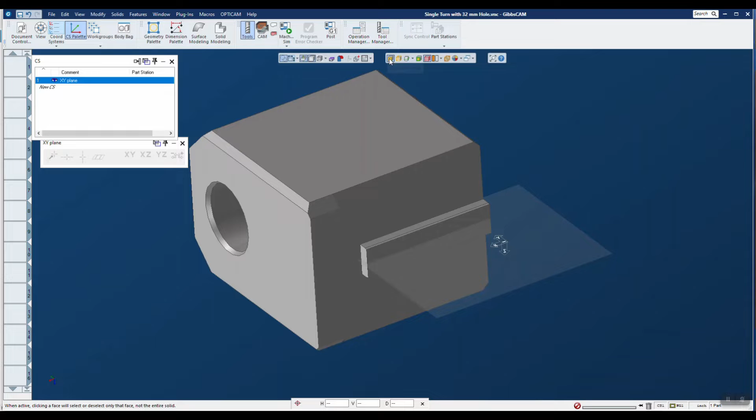The first thing I need to do is change the orientation of this thing. So I'm going to turn on my face selection, pick this, and pick the option that says align face to CS. You can see it's popped it forward here.

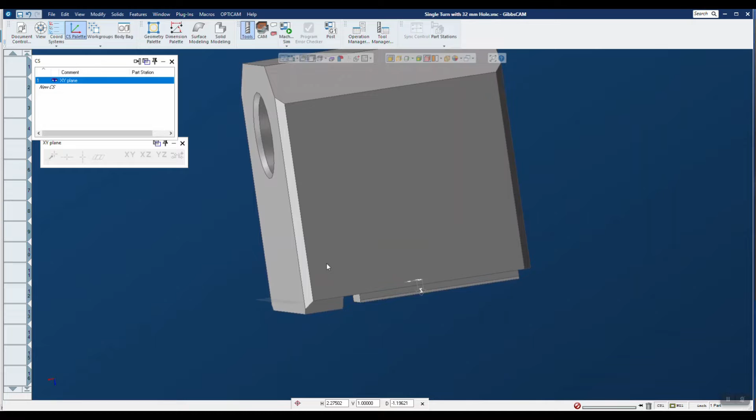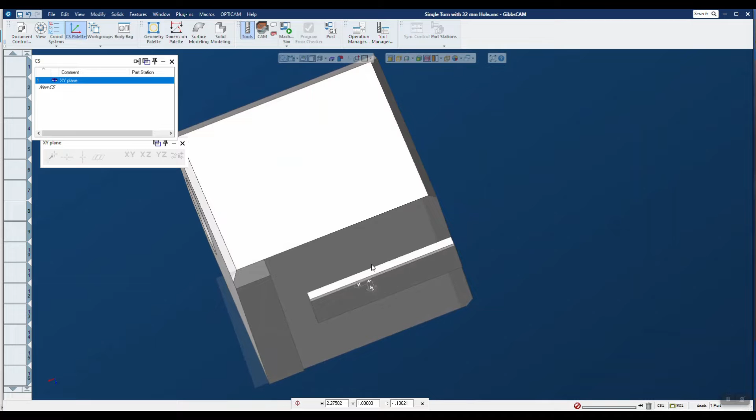Also, I want to point out there's this little ledge here. I'm going to call this the front, because this will snap onto the front of the turret. You'll notice I picked this face and not this face, because this face is going to insert into the turret. So this is a slot that will insert into it. So my zero plane is actually this face right here. I purposely chose that face.

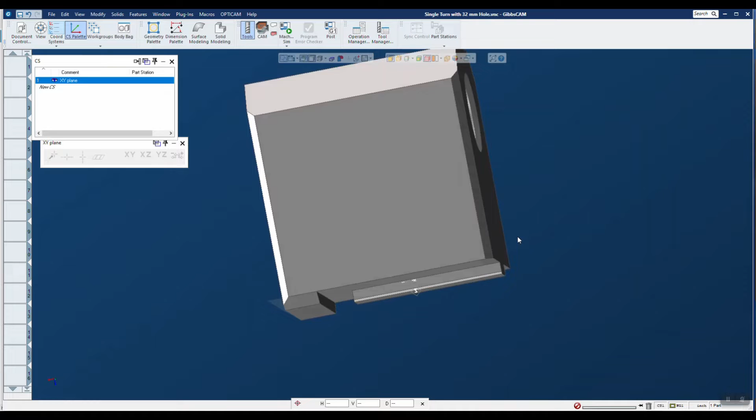What I'm going to do now is get my attachment point to the turret, and I want it to be right in the center of this block. You may choose to do other things, but this is the way we're going to do it for this exercise. So I'm going to turn on my edge selection.

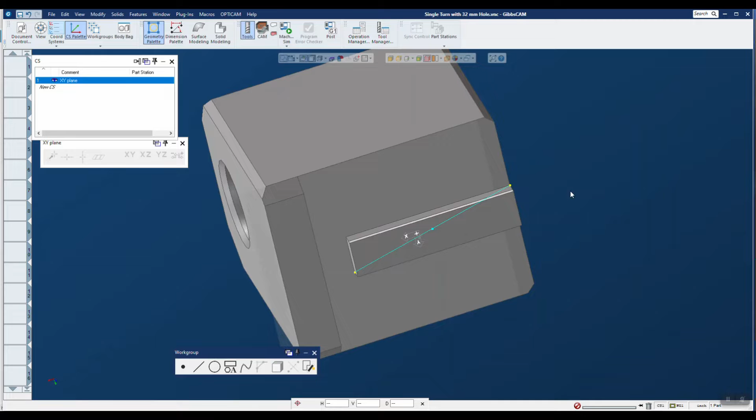There's more than one way to do this, but I'm going to pick a couple of edges here and extract them, mainly just to get 2 points, namely these 2 points right here. I'm going to do a little geometry creation, a line between the 2 points, and then connect this line up. Again, not a geometry exercise, but I'm going to split this using the GeoSplit plugin right down the middle. I did all that just to get this middle point here. You may have a different methodology you want to use to do all this, which is fine.

Now that I have that done, I'm going to move this using the absolute translate function. I want to move it from this point, using Shift Alt to fill the from position, so you can see it's got all this. Then I just want to go to 0, 0, 0. I'm moving this whole thing there. So let's go ahead and hit do it.

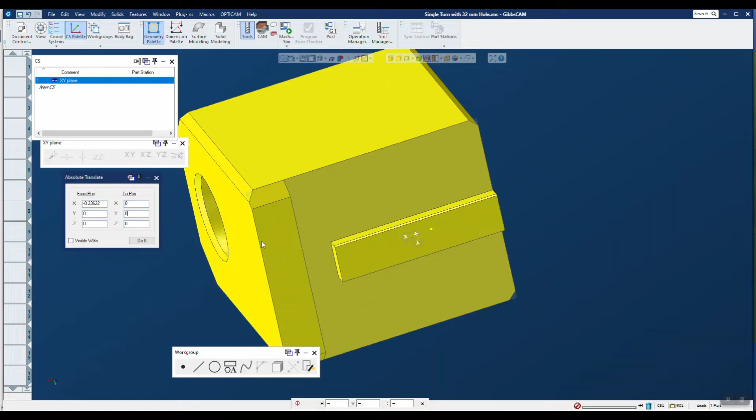And now we should be centered. I don't need this point anymore. Right where I need to be, I have my orientation correct. To review, this X should be pointing towards the front, which I'm calling the front. This will attach to the turret, and your Z should be pointing straight down.

Now that I have that established, we want to establish our tool attachment points. In this particular case I actually want two: one for a boring bar that has a front orientation, and one for a boring bar that has a back orientation. I'm going to go ahead and do both of those, and I have to create coordinate systems to do that.

Okay, so I'm going to make a new coordinate system, and I'm going to call it tool position front. And now I can start to modify that accordingly.

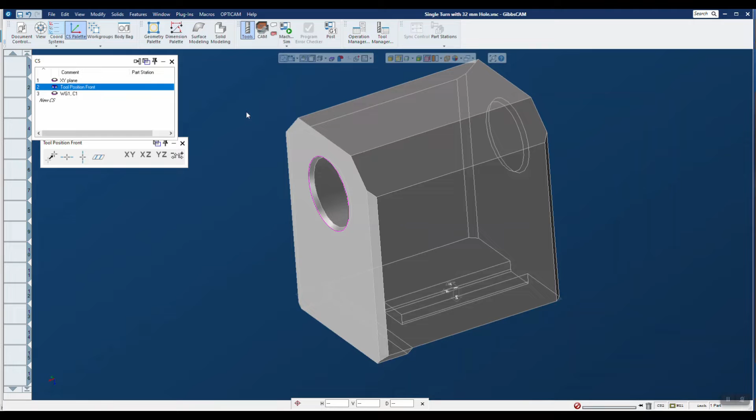Now, one of the things I also want is a point at the center of this that I can use as the origin. So I'm going to turn on my edge selection once again and extract those edges once more.

And then I go ahead and get a point at the center of that circle. Okay, so I'm going to go ahead and get rid of that. That's all I really wanted was that point.

So for the orientation, what we want is the D of our coordinate system, that is the depth, to be pointing inwards, and we want the H component to be pointing down, so that it's consistent when we have a boring bar. As we'll see later when we test this, the boring bar can be positioned up and down, so to maintain consistency, we want to follow those rules.

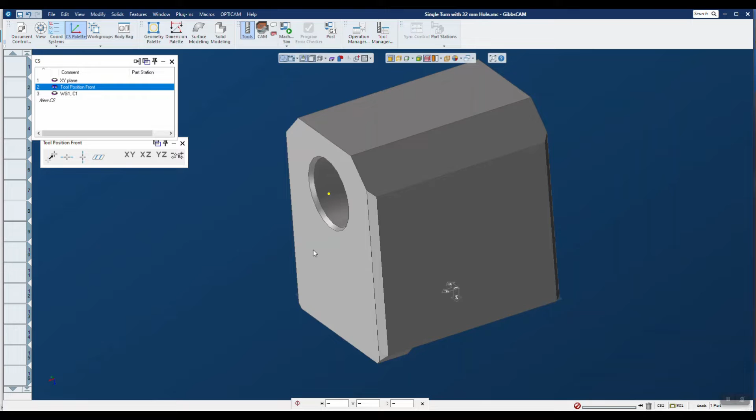Okay, so again, no particular order, but I'm going to turn on my face selection, right click here, and use the align plane through and move. And what you can see is that it's down here.

Oh, one other thing, before I do that, I want to make sure that I make this belong to this coordinate system 1. The reason for that is when I start to move this coordinate system around, I don't want this point to move.

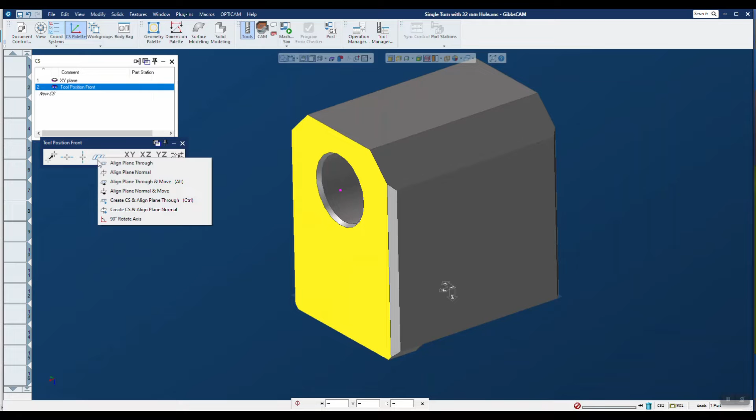So let's do that one more time. I'm going to pick this, right click, and say align plane through and move. You see my point did not move that time.

Okay, and then what I want to do is pick this point and change the origin to there. And voila, I believe we have what we want.

We have the H component, which is the Z in this particular case of a right-handed coordinate system, pointing down towards the mounting point, and the D pointing in towards the center of this. So we have our first coordinate system made here, right?

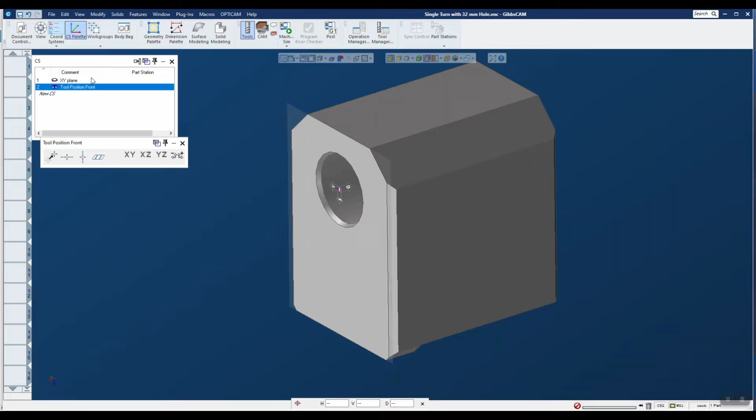Let's do something similar to get the other side. So again, I'm going to turn on my edge selection, extract this, and let's go ahead and get the center point of that.

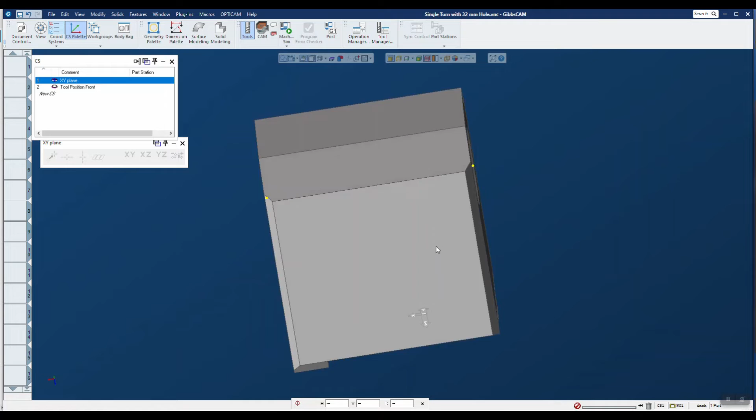And I can get rid of that circle now. Once more, I am going to make this belong to the XY plane without moving it, so it does not move when I start to create another coordinate system.

So I've got this. Now I'm going to create a new coordinate system, and I'll call it tool position back. Okay, so we've got that established.

And actually, remember I said I want the D to be pointing inwards. Okay, so what I can do is just hit this. That will switch my D so it's pointing in.

Now what I want is to change the origin to here, so I'm going to pick that point I just made and move the coordinate system. Okay, so we are getting there, but our H component here is not pointing down, is it?

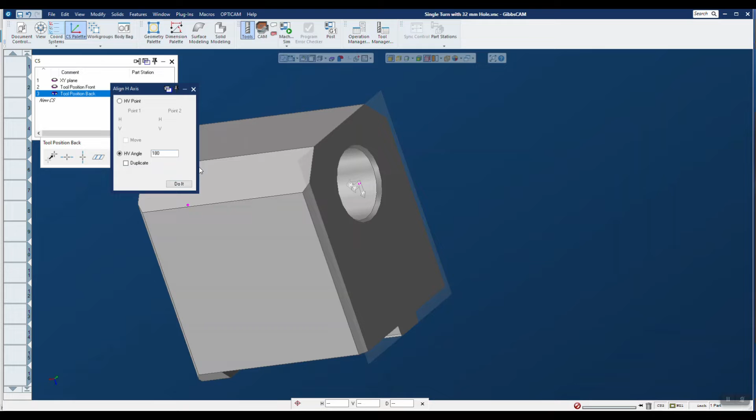Okay, so one way I can do this is the align H-axis function. Tell it to swing around 180 degrees.

Okay, so now if all my logic is correct, my D is pointing in, my H component is pointing down on both of these coordinate systems, and we've already established the position of the solid to the mounting point. So we've got everything ready here at this point.

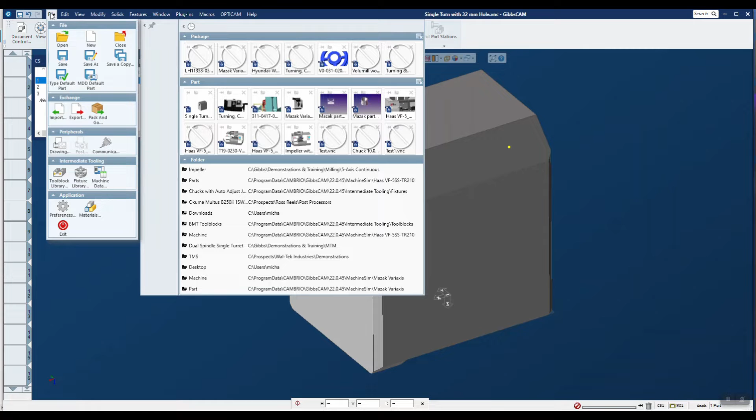Okay, so what I'm going to do is go to File and then Tool Block Library, because this is our tool block. Now you notice I already have one established called BMT Tool Blocks, and that's what this is from BMT.

But if I didn't, and this is my first time, I'd simply hit Create here and then give it a name and then follow the procedure that you're about to see right here.

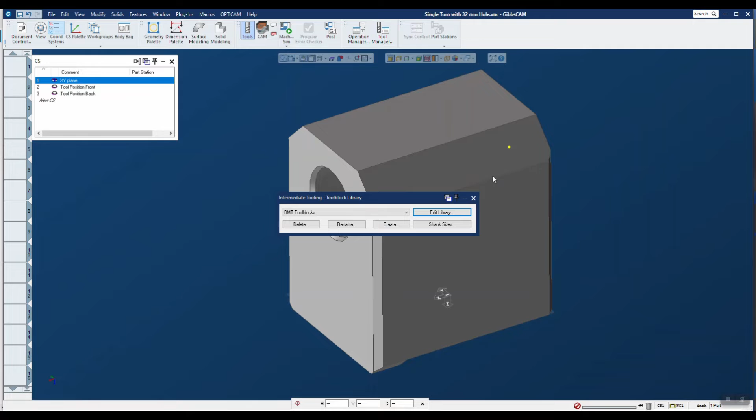Okay, so I'm going to just go ahead and use this existing library and say Edit Library. And you'll notice that by default, it goes ahead and gives it the name of the VNC file that you're in.

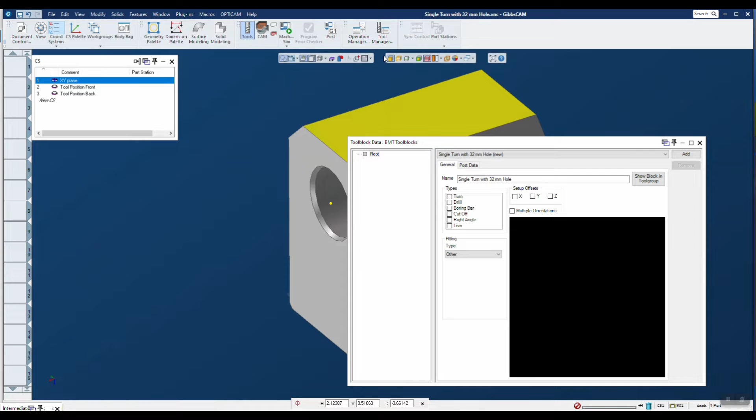So it's single turn with 32mm hole. We have to give it some information and start populating this. What I'm going to do first is turn off my face selection and pick the whole solid.

Right click on the root, add child, and a simulation body. It'll give it the same name it has, and give this solid the name single turn with 32mm hole, so it matches the VNC, but it might be a completely different name. So you probably want to go ahead and name this to what you want it to be, so that you don't have to override it and everything matches.

You notice I have the Apply Selected button checked on as well. So I do that and it kind of gives me a little thumbnail sketch of what that's about.

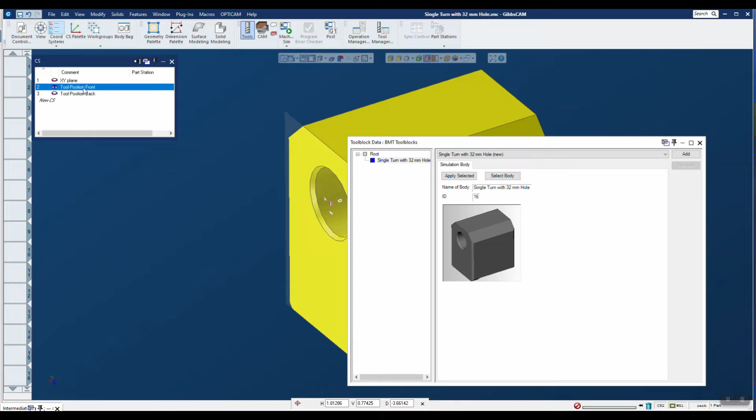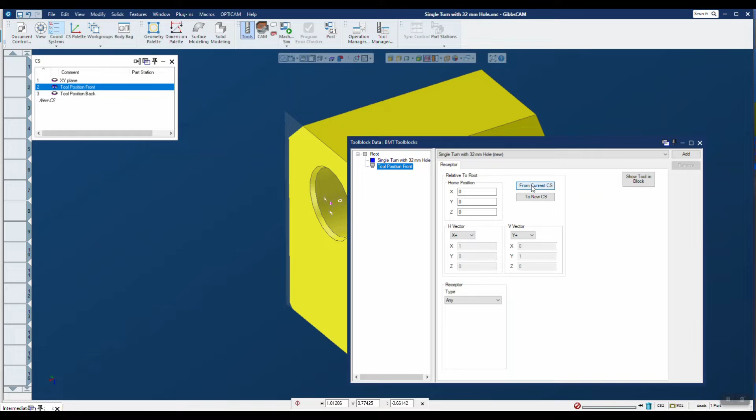I'm going to activate coordinate system number 2, and add a child called a receptor, and give it the same name I gave it here. I'll say tool position front. I could go and do all the orientations manually, but as long as I've activated this, it's simple to just say from current CS, and it fills everything in for you.

In the same sort of way, I'm going to move this over a little bit so we can see both, and activate tool position back.

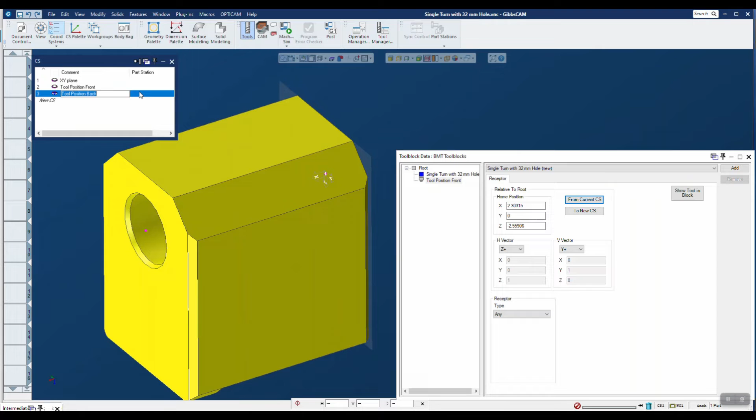Now what I'm going to do is add one more receptor, and as you may have guessed, I'm going to call it tool position back. Hit OK to that, and again since I've activated this, I can just go from current CS, and it'll fill in everything for me. So that's the main steps to get things ready.

Now these are optional steps, but I like to do them. You can categorize it, so I'm going to say this is used in turning, and drills can go in here, and boring bars can go in here. Not cutoffs, not right angle heads, and not live tooling. Then for a type, I'm going to say this is for turrets - a turret type tool block.

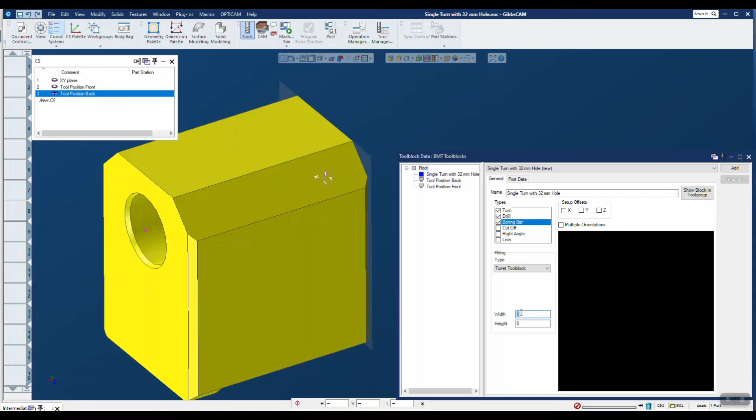And then also what I can do is measure some things. I happen to know that this one is, in millimeters, 75 millimeters wide and 93 millimeters tall. Now you don't need to put this information in, but it's just kind of a reference when somebody brings it in, in case they're wondering how big this is. This gives them some frame of reference.

One last thing I want to do before I add this to the library is go to the Setup Offsets area and click on the X box. This means when I use it, I want the option of being able to adjust it in the X direction. In this case I don't care so much about Z or Y, which is why I'm not checking them on, but if I did, I would check those on to have the option to move them in that direction as well. So now everything's set up.

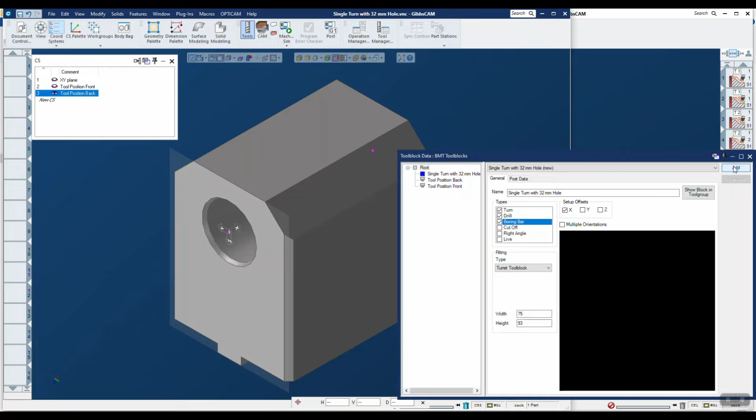I'm going to go ahead and add it to the library by hitting the Add button. It will go through some graphic gyrations here, and when it's done, it's now added to the library.

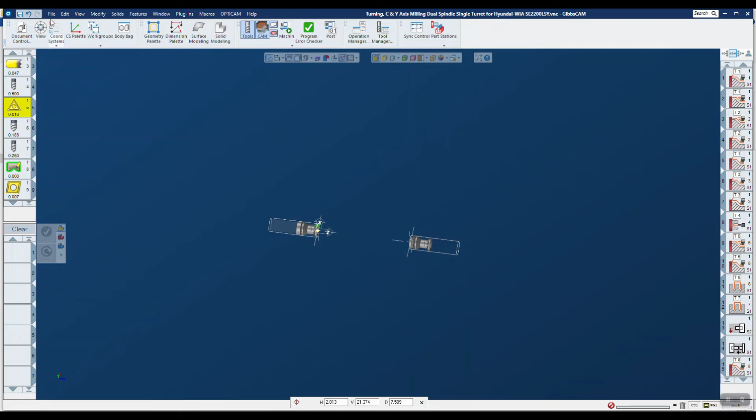What I can do now is go ahead and test this out. So I'm going to go to another file that I've set up for testing. One of the things you want to do first is go to File and Machine Data.

So I'm using a particular machine, a Hyundai Wia SE2200 LSY, but whatever machine you're in, you have to modify its MDD file, the machine definition document, so that it recognizes where this library is. So I'm going to hit Edit here, and you'll notice it brings up a box with lots of things.

In this case for tool blocks, what's important is that I only have one tool group here, but that I say use tool blocks, and you'll notice it says turret and there's 12 stations. Doesn't hurt to turn on the use multi-position tool blocks either, and make sure you leave your options open in case there are multi-position tool blocks available. Then over here you'll notice it says tool position 1 allows any tool block, right?

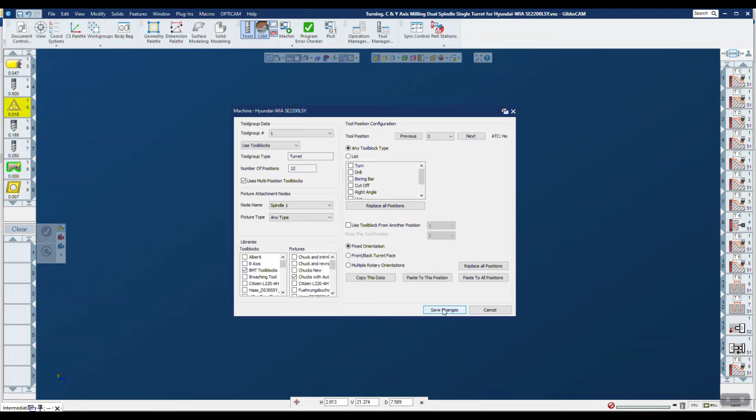I have 12 of these, and all 12 have been set up to accept any kind of tool block. You'll also notice BMT tool blocks is checked on for any station I check here. If you want full access to that, make sure this section, this section, and this section are all filled out correctly. Then save the changes and close out of this.

So what I'm going to do now is test this out. I have a drill established here, but I'm actually going to try it with this boring bar. The reason I'm doing this is because I want to test the orientation, whereas if I do a drill it doesn't really matter on the up and down. We'll see here in a minute what I mean.

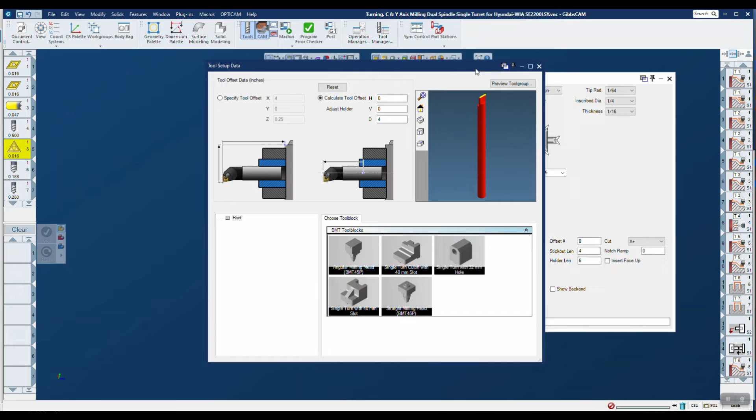I'm going to click that little blue icon here and pick a single turn, and it fills in everything. One other thing I should have pointed out is that I clicked on the offset X. That'll allow me to shift it along this axis in case I want to move it back and forth a little bit. Keep that in mind, but you see all the other information I had is here as well.

Let's jump out of this a second since I've added this, because now our graphics have changed. This is what I want to check - I want to make sure that when I say the orientation is up, it's up, and when it's down, it's down. You'll also notice it took away some of the other orientation options that I have, because the tool block is restricting the choices you have here.

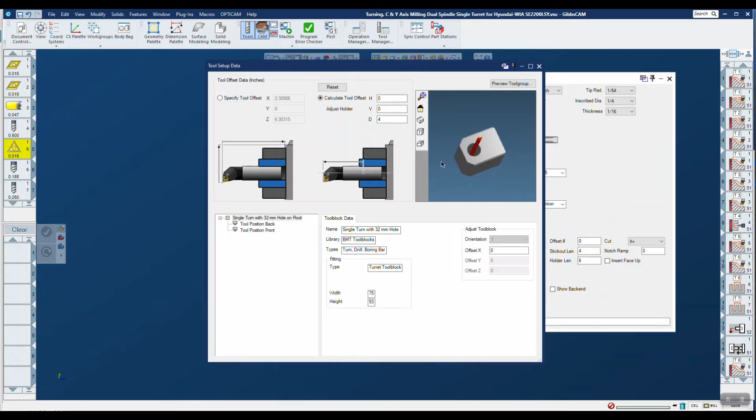So notice that we have it up, and also, it's very familiar, we have tool position back or front, because remember we made that. I'm going to pick front first, and let's go back in and check this out. It shows us here kind of a preview.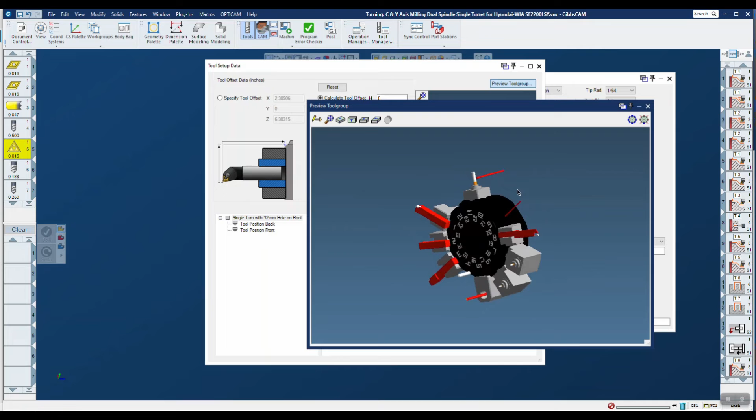What I can do also, since this particular machine has a turret, is preview the tool group - it's kind of nice when you have a turret established. Remember that we are station 5. So when it swings down, it's going to roughly have this orientation, and it should look like it's up, which indeed it does, right?

Let's jump out and change the orientation to down - again, we're just checking some things out. Preview the tool group again, and now we can see that it's switched to down. You notice it's centered in that hole as well.

Now, this D value in a situation like this will be the stick out length on the first page. You notice the stick out length is set to 4. If I set this to 0, you're going to see that this is now just right at the front of it - it's not sticking out at all. So if you want it to stick out a certain distance, you can either put it in here, which will populate your stick out length, or go to the first page and do it there as well.

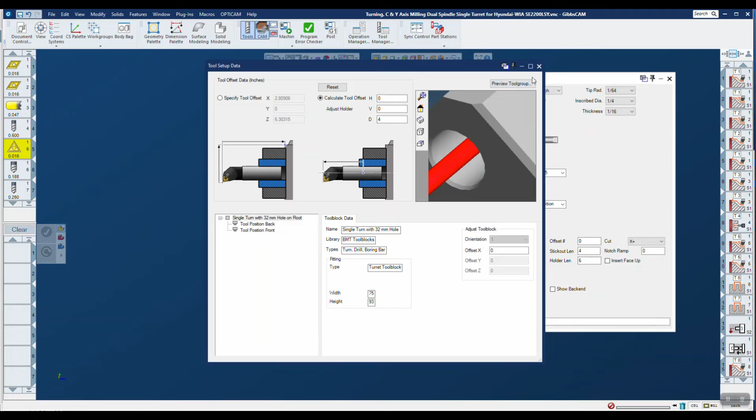So we previewed our tool group, it all looks good - that's facing down. Suppose I want it facing backwards now. What I can do is go to my tool position and select back. You notice the graphics change, so we have an up orientation and a down.

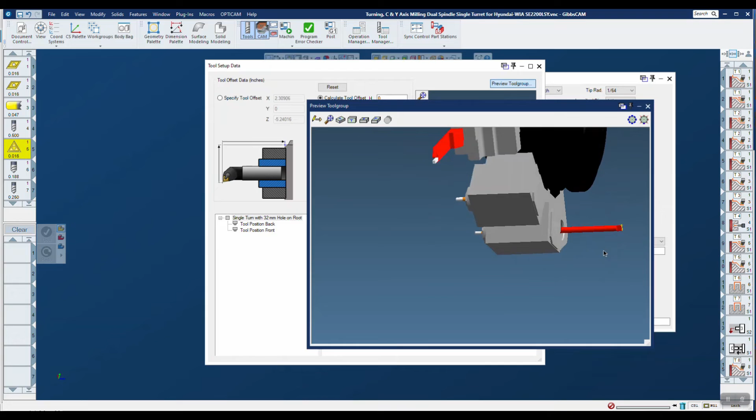We'll test the up first since that's what it gave us first. Again, preview the tool group - now you'll notice it's sticking backwards, and the orientation is up right now, which is correct. Now I'm going to pick this for down.

Again, preview the tool group to test this out. Good, it's sticking down. Now you can continue to play with this in terms of your stick out length. If you wanted to shift left or right, you can play with the V value, and if you want to move the other direction, you can play with the H value - that'll move it up and down like this. But for something like this, being centered is what you want as well. Obviously you'd have a column in there, and you could go to the trouble of doing that as well with some more intermediate tooling.

But in general, those aren't going to collide with anything that you're interested in. So you can choose to do that or not. But this is how we would do it.

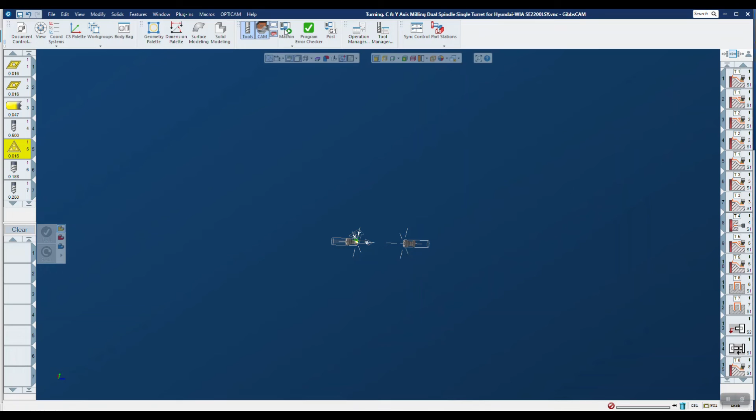Now, one other thing I should point out is, let's hop out of this and go into Machine Sim. We have a Hyundai Wia machine here in this particular case that we're going to use. But the principle is the same no matter what you're going to do.

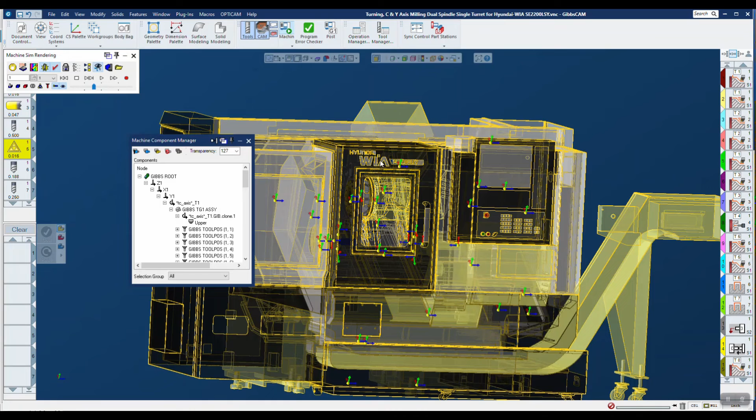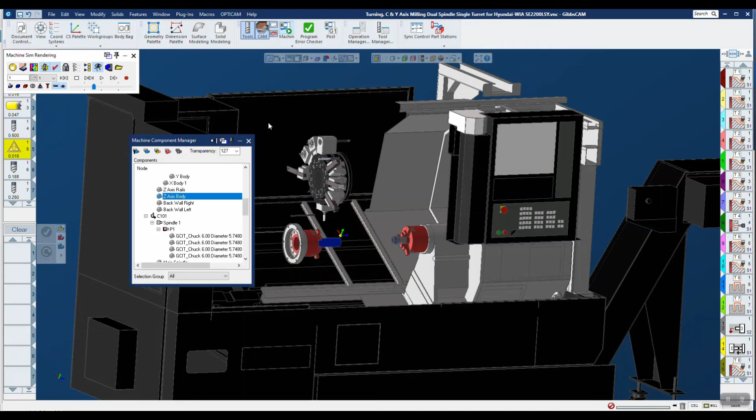I'm going to get rid of some of the components on here just so that it's a little bit easier to see and do some measuring, which is what we're going to do here. Okay, maybe a few more here. Again, I'm just clearing some space out because I want to make it easy to rotate around and look at stuff here.

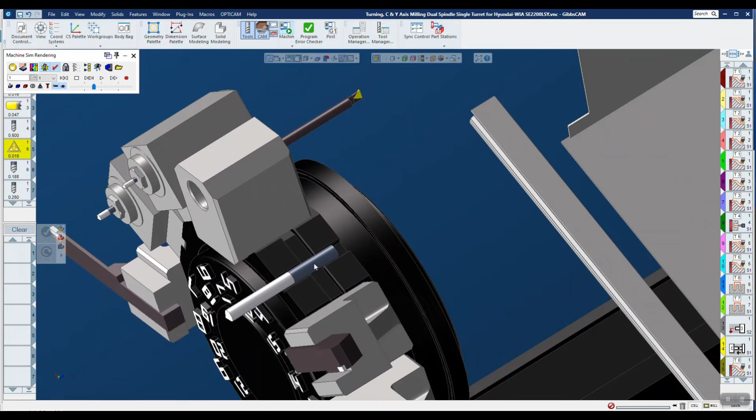So remember, we're on station 5 here, which is right like this. On this turret, each one was done. You'll notice some of these we don't have tool blocks on yet, like tool block 4. We can populate that later. But the entry, the mounting point, is right here in the center for each station, so it really doesn't have a frame of reference for where this thing is.

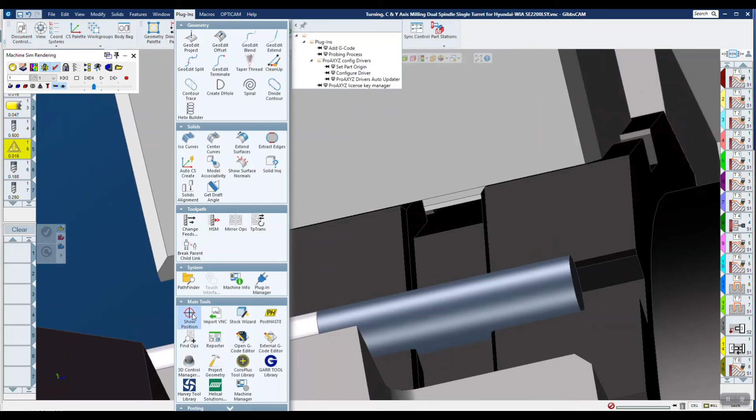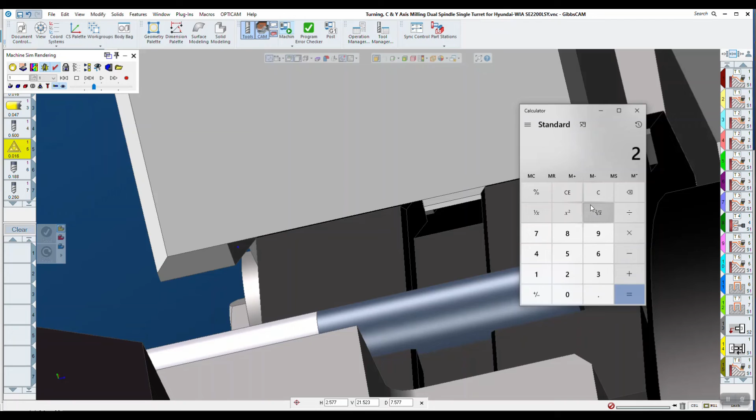So that may be fine. I mean, you're going to zero the tool anyway, but let's suppose I wanted this little ledge right up against the turret. Well, you can actually measure. I'm going to use my tool plugin's show position, and use it in position mode. Notice I have my face selection on even though we won't actually see it. I'm going to just click around here. You'll notice one value has remained the same, which is this 2.577. So I'm going to put that in here, 2.577.

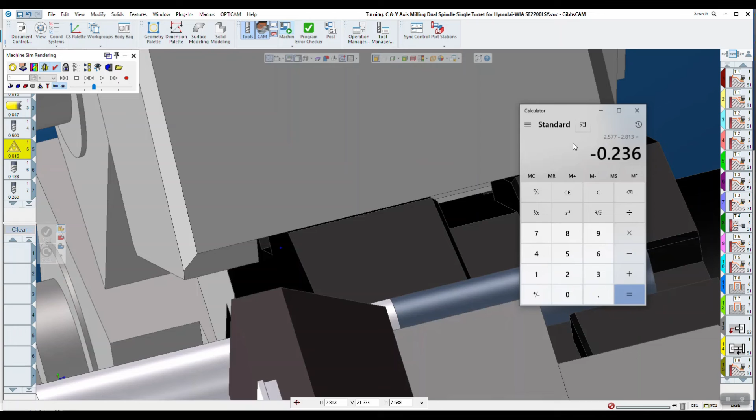Now what I want to do is swing this around and see what the H value of this is, and it's 2.813. So I'll go minus 2.813. So the difference, and this is in inches, is minus 0.236. Okay, let's just keep that in mind for now.

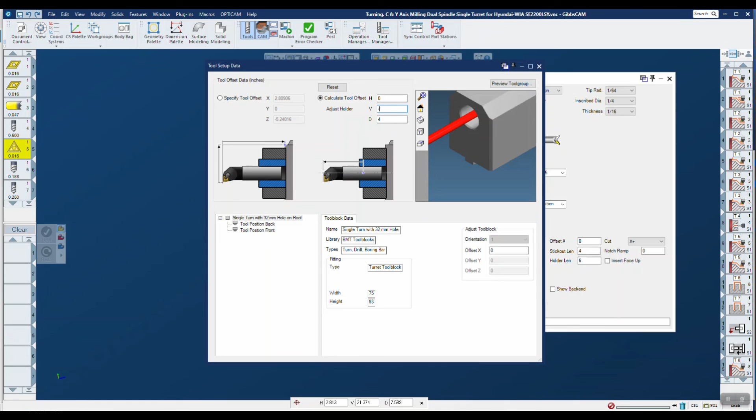That's what I'm going to do is jump out of Machine Sim, and let's jump back in to here. And again, what if I wanted that nice and flush up against there? I'm going to put in — by the way, in this example, this is an inch example, even though these are metric tool blocks. Keep that in mind, but I want to put in that value directly. I actually could have copied it, I guess, and pasted it, which I probably should have done. But let me just put this in real quick.

Okay, all right, I'm sorry, that's the wrong value, my fault. The one I wanted to put in is right here — remember I talked about moving the block along here. So I'll say minus 0.236.

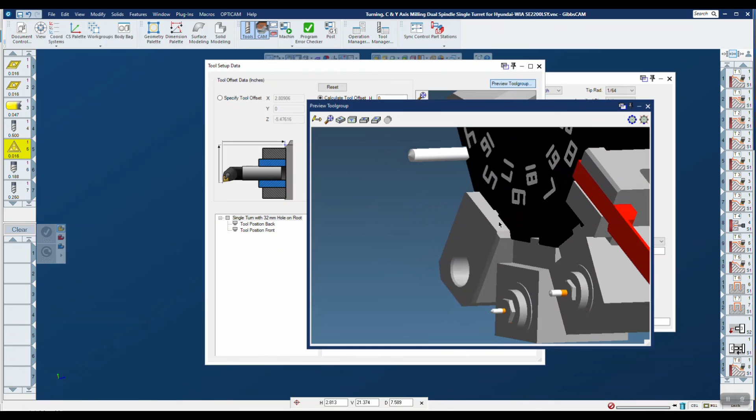Let's preview the tool group and see if we can see that visually here on station 5. I think you can, if I just do this, that the edge of this is right up against the front of the turret now. So I've moved it back that distance.

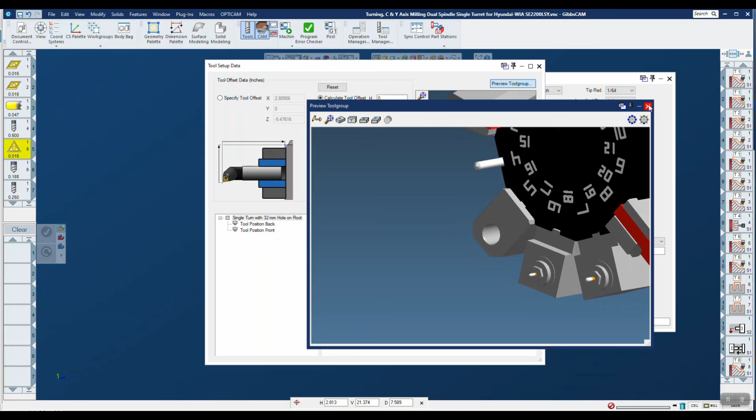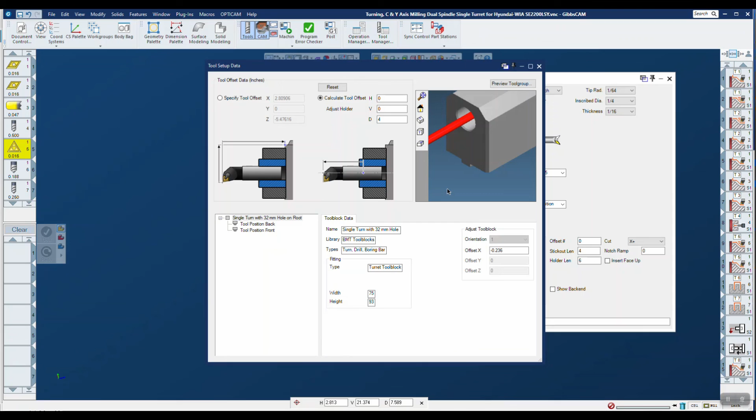So you do have the ability to move these blocks back and forth as long as you've opened that up. In this particular case, I only opened up the offset X value, but I could have opened up Y and Z. I just didn't see any reason why anyone would want to move it in those other directions, but you certainly have the flexibility to do that as well.

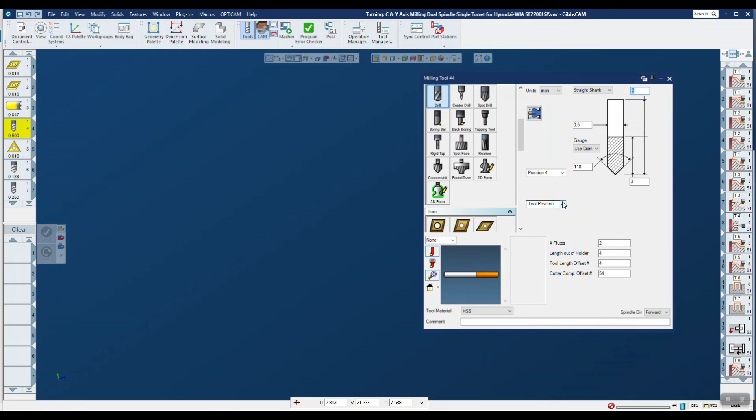Okay, so now that I have that done, I could go on. For instance, we noticed station 4 was not populated, right? So I could go ahead and use this in station 4 at this point as well, if I like. And for this one, I believe we want it facing to the left, so I'm going to tell the tool position front.

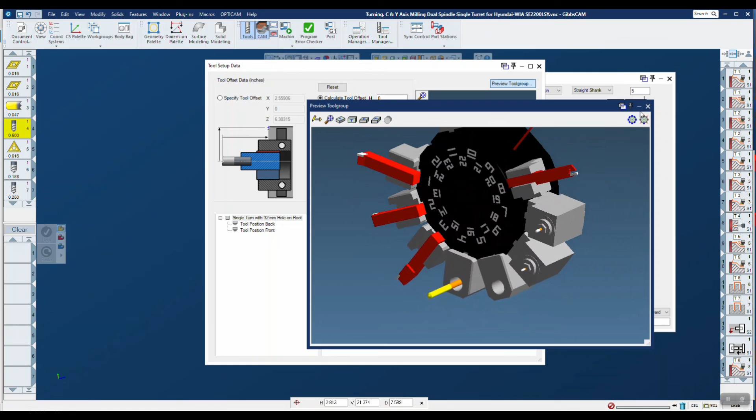And again, let's preview the tool group. Now we can see in station 4, we've populated this. So in station 5, we have it pointing backwards, and station 4, we have it pointing forward. So a lot of flexibility here in how you can define it.

And then once you define it, how you can use it and have multiple tool mounting points depending on what your application is. So that's the end of this demonstration. Thank you very much.